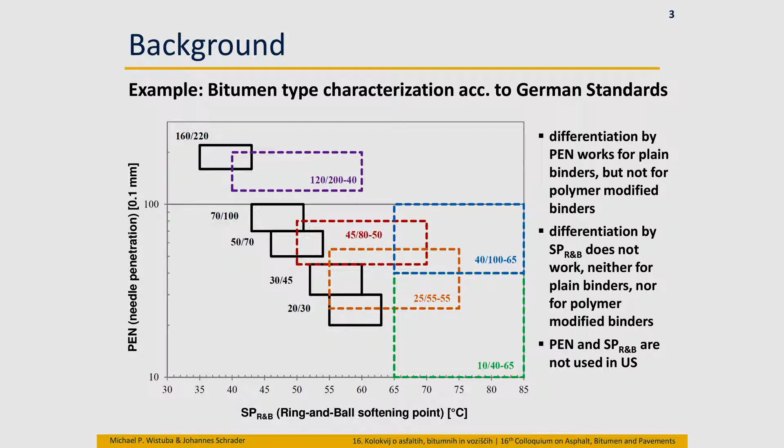So the outline of my presentation is a little bit of background why we believe that we should not use needle penetration and softening point anymore, and why we believe that we should use new test methods, mostly based on the dynamic shear rheometer. But I'm not so convinced by what Markus said before, that we need more complex testing. We need a more complex test apparatus, test equipment maybe. Dynamic shear rheometers are more complex, no question about that.

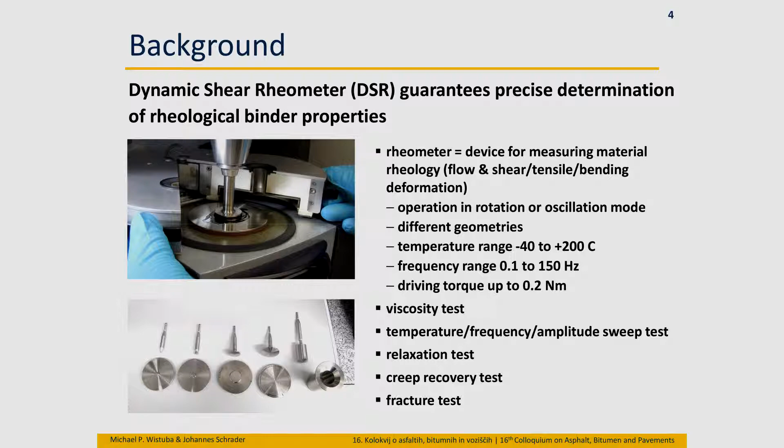But we need simple tests, and we need simple parameters to interpret the test, which are based on physical parameters with a physical meaning. And I would like to show you one example of the idea we are focusing on in Braunschweig. And then I will give you in the end some examples of application of this newly developed binder fast characterization test, as we call it right now in English. In German it is BTSV. I will explain later.

So in Europe, bitumen is often characterized through needle penetration and softening point. And these test methods celebrate their birthday. They are 100 years old, and it's time to replace them. And we should do it by new tests.

Bitumen type characterization by softening point and needle penetration, as you can see here for typical German products, doesn't work very well. You can maybe very well differentiate with needle penetration, but just the non-modified binders. And as far as the softening point is regarded, there is a big scatter, and we are not able to precisely tell you the characteristics of asphalt materials with such modified binders. We have big problems. So we will not be able to improve asphalt quality by not knowing correctly the binder properties.

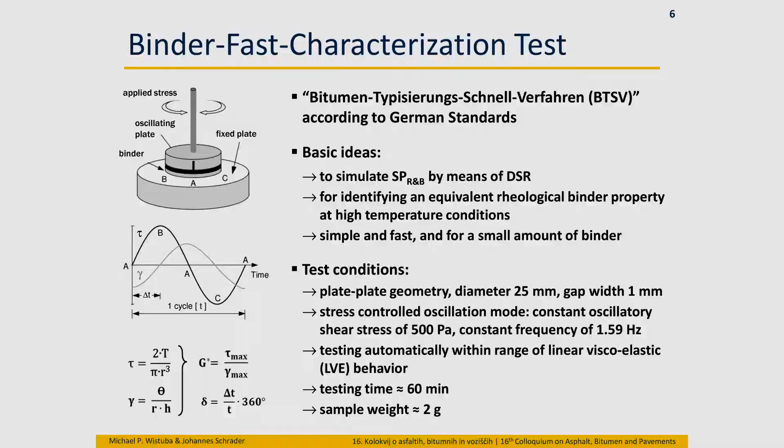So there are two conclusions. The traditional methods are unable to correctly characterize binders. Many authors have reported about that. And in the US, the pen system, so the needle penetration and the softening point, have been substituted a long time ago by the PG binder system for binder specification. Maybe this could be a better option. We believe that it is not, and we should not take this over. We should develop our own procedures.

So the principle of the softening point method is transferred to a method where we determine the rheological parameters of the bitumen. And for this purpose, rheometers exist. This is equipment where you can measure rheological properties of any material. So we should rely on the results of rheometers. And there are a couple of different rheometers, and there's a variety of parameters you can change as regards the testing geometry, frequency, load, etc.

And we tried to use the dynamic shear rheometer in oscillation mode to simulate the softening point. That was the principal idea by Alexander Alisov, and I remember by heart the day he entered my office and said, I would like to try to simulate the softening point by using the DSR. And I immediately told him, that is a very good idea, so please focus on that, and he did so, and this year he finished his PhD thesis on that.

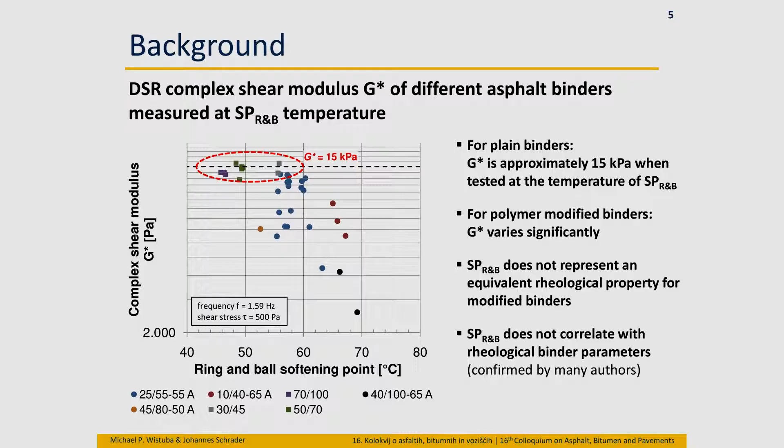And you see this dotted line in a range of 15 kilopascal, and all the plain binders are grouping around this line, which means that G star, the shear modulus, is approximately 15 kilopascal when testing plain binders at the temperature of the softening point. And for the polymer modified bitumen, G star varies significantly. There is a wide scatter. And in the end, you can say the accuracy of the softening point for modified binders is 15 degrees Celsius, which is out of scope. So we cannot use this method.

So the softening point does not represent an equivalent rheological property for all our binders. It is not. So that is also why the softening point does not correlate with rheological binder parameters. We have a big problem when using this parameter.

So the newly developed binder fast characterization test called BTSV, it's not the Braunschweig Football Club which we mean here. It stands for Bitumen Typisierungsschnellverfahren. So we tried to translate it, and in the end we came up with binder fast characterization test. There is already a German standard for this method. It's DSR in oscillation mode, and the basic idea is to simulate the softening point for identifying an equivalent rheological binder property at high temperature conditions.

We would like to implement this method for binder control, and therefore it has to be simple and fast and has to work for small amounts of bitumen. So the idea was to find something where you can find a very strong parameter within 1 hour. So the idea is maybe in the future to have a DSR at the asphalt mixing plant to check the bitumen delivered, which is nowadays very poorly checked, if it is checked in any way. So test conditions, I skip it now for reasons of short time.

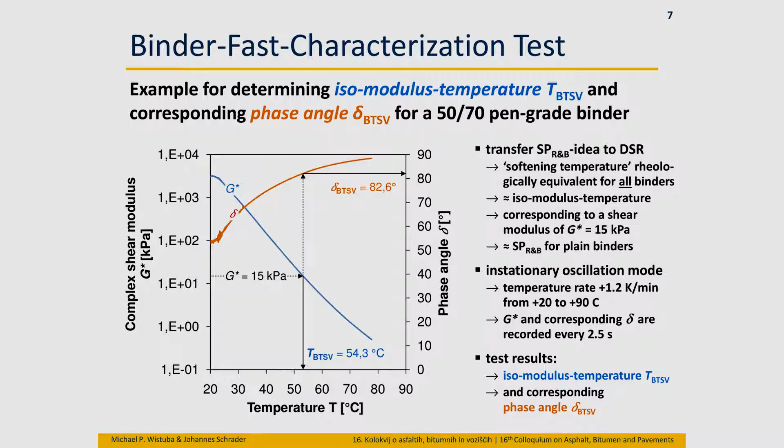Here you can see an example of this test method. You find an equi-stiffness temperature, or as we call it right now, the isomodulus temperature. The idea is a softening point which is an equivalent rheological parameter for all binders. And as you can see on the graph, it's an instationary testing mode, which means that temperature is increased during the test by a constant rate of 1.2 Celsius per minute, starting from 20 to 90 degrees.

And then you measure G star, which is decreasing at the same time, of course, because the binder gets softer. So you see the familiarity with the softening point method. At the same time, the phase angle is increasing. And now we go to a point where G star gets 15 kilopascal. And that is exactly the point, per definition, where we get our key parameters, which is the temperature, T BTSV, and the corresponding phase angle, delta BTSV. These are our two parameters. These are the test results.

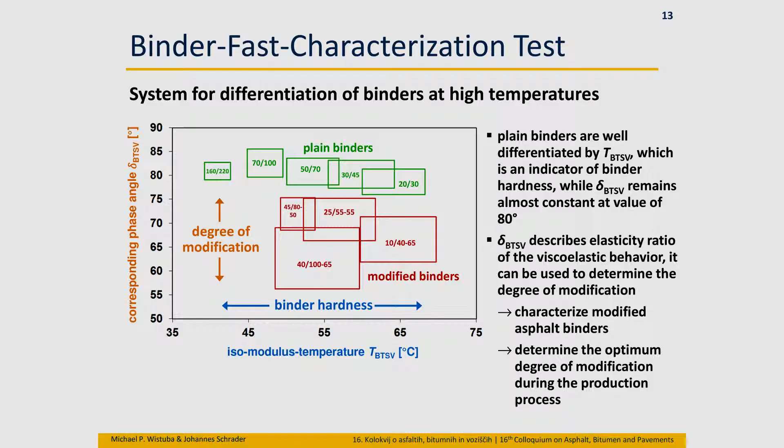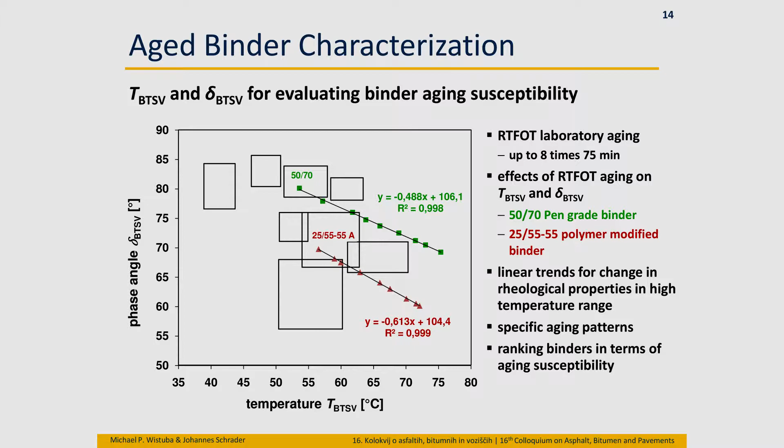A second example how to use these parameters is to use these key parameters for evaluating binder aging. As you can see here, it's a 50/70 pen grade binder. So you see the green boxes, and you see how this first green box is developing downwards, and this is because of aging this binder, 1 time in the rolling thin film oven test, up to 8 times.

So what we found here is very interesting, and it is ongoing research to test and to check this development for different binders. But if we can confirm this way of development for all binders, this would mean that aging is a linear procedure. And this is ongoing research also together with the Technical University of Vienna, where we want to look at if we find this linear change in properties also in a chemical way. So this is of interest, because if we can establish a linear relationship of aging for any binder, we can also predict binder aging. So that would be a very interesting first step in that direction.

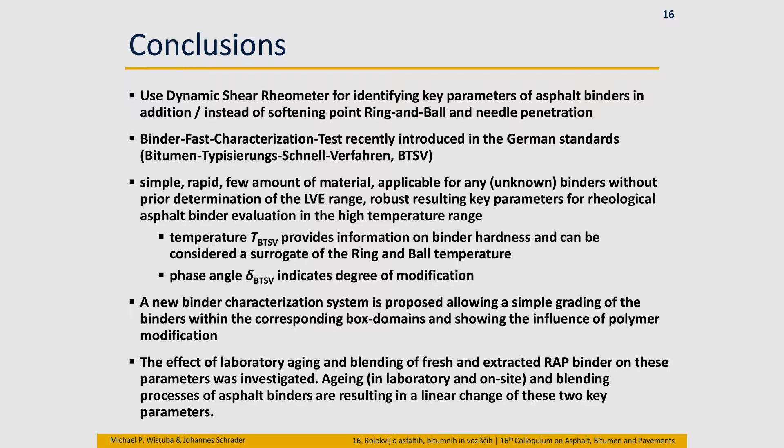I come to the conclusions. We think that there is increasing need to substitute the old traditional methods, softening point ring and ball in the first step, especially when we do routine testing of asphalt binders, when we control quality. The binder fast characterization test using the DSR is a first step in that direction to determine binder properties in the high temperature range. This BTSV method is very simple. Even if you have never worked with DSR, I'm very sure that you are able to do the test when we show it to you in 1 hour. You just need a DSR, but the test itself is really simple. It's rapid, 1 hour, and you have your test results.

It's applicable for any binders, even if you don't know the binder. You don't have to check the linear viscoelastic range before testing it. That is a big advantage. You can immediately apply this test method. And the test results are extremely robust. The repeatability is excellent. The T-BTSV is binder hardness, and it's a surrogate for the softening point ring and ball temperature, especially for the plain binders. And the phase angle gives information on the degree of modification. This BTSV can be applied for binder type characterization, for quantifying aging effects in the future maybe, and for blending of fresh and extracted RAP binders. This I tried to show you in simple examples.